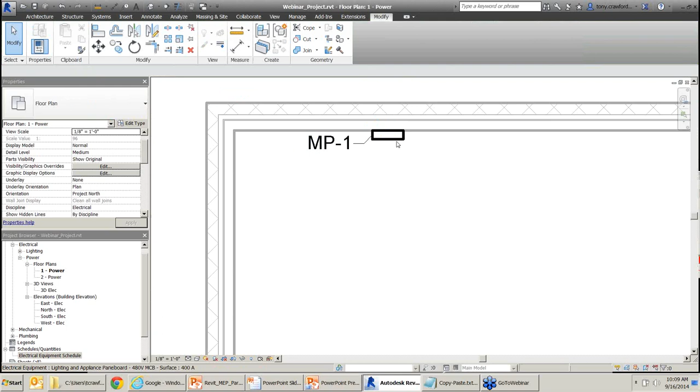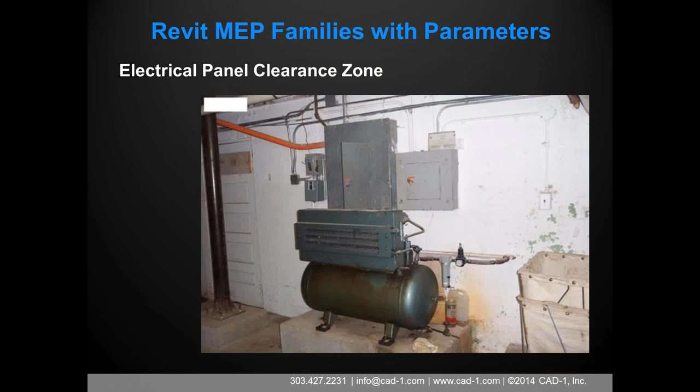Okay, that's the one I'm going to alter because I want to have a clearance zone around this, so that I can do clash detection, so that at least in the virtual BIM world, in VDC, BIM, I can prevent things like that - assuming this was new construction, assuming it was planned, which this one was probably not planned very well.

So I'm going to put a clearance zone around there so you can specify and do clash detections.

Is it Monday again? Yes. Every time you say that I keep thinking of Flash Gordon, Master of the Universe. Great, now that's your new nickname, or Jason over at BCR's new nickname - Clash. I don't think he's old enough to remember that though, he's a young whippersnapper.

Anyway, so I'm going to open this file, and what we're going to do - the first few steps, kind of maybe even on paper - is just take a look at the family. What already exists in the family? This one's fairly simple, which is good because I need to get it done in an hour.

How are they used? Are there formulas already in there? Are there values in there? What are the reference planes named? That would be a good thing to take a look at, and you do have to click on the reference planes one at a time to see what the names are.

Where you want your clearance zone - left, right, top, bottom, 30 inches, 36 inches, whatever - so basically plan your family. This step, honestly, if you pulled out a piece of paper and did it by hand - I did that for this one, just to keep myself organized. So that's not a bad idea, to plan it out ahead of time. In fact, I'd recommend that.

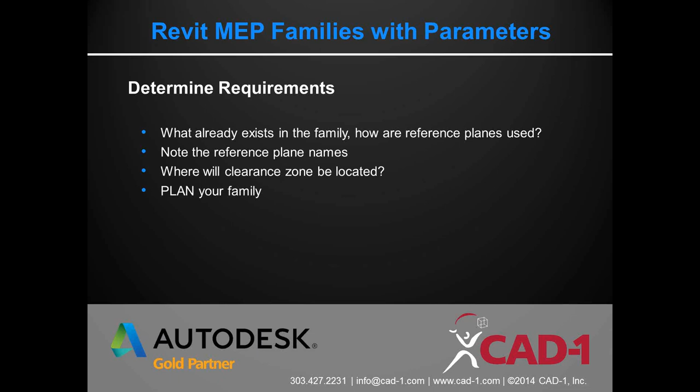It's a model - the clearance zone is a model element - so it can be used for clash detections, whether in Revit or Navisworks, or just so it shows up while others are designing, so other disciplines can see the space that you need. This could be electrical, mechanical, plumbing, architecture, ADA requirements, around doors and bathroom stalls, whatever. You can use the same principles for just about anything.

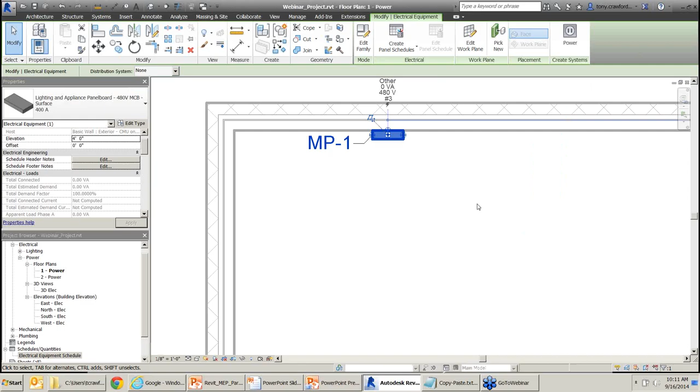So the steps I'm going to do: first I'm going to rename the family - you might have a family that doesn't need renaming, but in this case I'm going to add our company name, company standards, so I know this is the approved one I've worked on. Then I'm going to create reference planes, add some dimensions, some parameters. Let's go ahead and do these first few steps.

So I've selected the family, I'm going to open it in the family editor and edit this family. It's a loadable family, a component family - see if I can get the whole name - there we go, it's an RFA file. At the top of the screen you can see the file name: Lighting and appliance panel board 480V MCB surface.rfa. RFA is a Revit family format.

Where'd you find this family? I was going to say it was in the template, but this one was not - they did not have the surface-mounted ones. That's a good question there, Chris. So did you get it from like an online source? No, this one isn't out of the box. But if you wanted to get something, what would be the quickest way to get a family from your program right here?

The quickest way to get a family - you know what, I can do this without even leaving Revit. If I need a specific family from a manufacturer - this panel, this switch, this air handling unit, this PTAC, whatever - from the Insert tab of the ribbon I can just start typing in Revit, and it'll search Autodesk Seek. It already knows what program to search - Revit families. Oh, you can't see the little circle I'm doing on the screen, maybe some of you can.

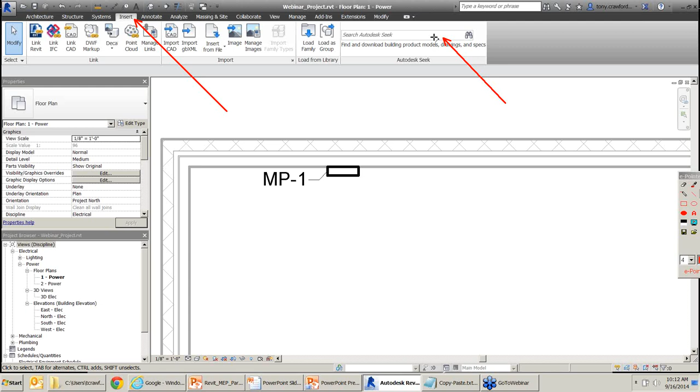So I can do this from right within the family. That is handy - they added that a couple years ago.

Okay, so here's what the family looks like - this is what's inside there if you haven't opened up families. This is a face-hosted family, and this block, this box around there, that's the face that represents the host. It's not actually part of the family - when you load this back into your project, that does not come with it.

And if you select it, look at the properties - oh no, wait, it doesn't say host. It just says other, which is not super useful, but it is what it is. Quick way to tell, well...

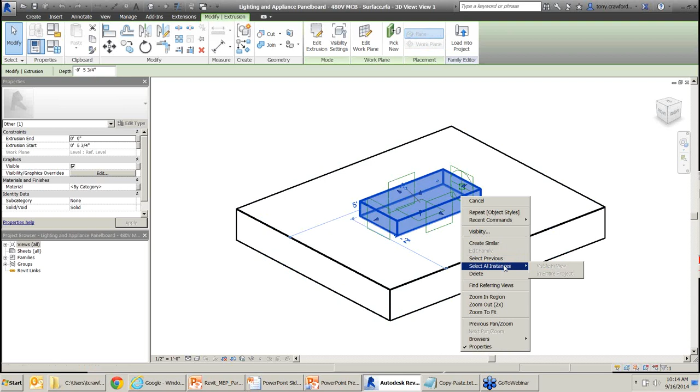One quick way to tell: if I right-click and try to delete this, delete is grayed out. It doesn't let me delete this host, as opposed to another extrusion. There we go - if I right-click, oh, I can delete this one. It allows me to delete it. So that's a quick way to tell.

I'm not going to delete this - well, I can't. What I am going to do is select it, and this is optional, but just hide it because I don't need to worry about this host. It's just going to confuse things. I'll probably hide this in a couple of views.

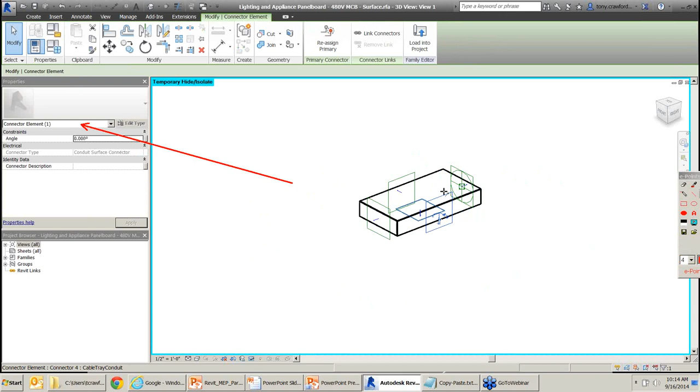So I selected it, then at the bottom I have sunglasses - I'm going to hide element. Also, these green items are connectors. If you select one, it does tell you it's a connector element, and you can see the different properties. What I'm going to do with this one, because I don't need to worry about these, I'm going to hide that whole category, and all the connectors will go away. Okay, that's a little cleaner.

This is what's inside there. I'm actually going to have to do this step again because I'm going to go to the reference level, basically a floor plan, a look-down view.

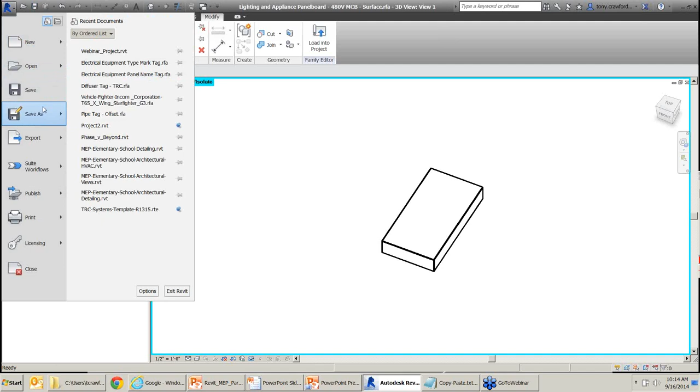Let's see - oh, first thing I almost forgot to do: I'm going to save this family with a new name. Oh, now the circle's showing up, at least on this screen. Will the circle be unbroken? It looks like it, but it keeps moving. Yeah.

I'm just going to put this in the same folder. You might have company standards, CAD-1. I can't talk and type at the same time - otherwise, one or both go really badly. I'm going to just add whatever your company name is at the end, or something useful, like maybe clearance zones, or whatever is useful at your company. Hopefully there's company standards for naming families, for naming files. If not, you might be the one responsible for creating them.

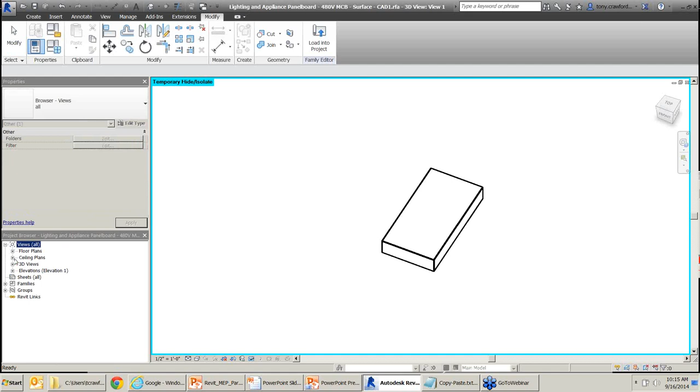Okay, now when I load this into my project, it will have a different name and it won't overwrite what's already there. Let's see - some other views. I'm in the 3D view right now. I'm going to go to the ref level, which is basically a floor plan that's looking straight down on this project.

And I'm going to do the temporary hide again, just to keep it a little simpler. Once you're comfortable, you might not need to do this, but let's hide that element, hide that category. Okay, that's a little bit cleaner. And then you can see this family is pretty simple.

I've got the geometry, the extrusion in the middle, and what - 1, 2, 3, 4, 5, 6. Math is hard - 6 reference planes. So I'm going to add actually more reference planes and more geometries, more extrusions.

So the first thing I'm going to do is add a couple of reference planes - a couple ways you can start the commands. I'm going to put a box around the outside of the existing reference planes. I'm going to draw them consistently from left to right. It doesn't matter quite so much which way you go as long as it's consistent, and even Revit doesn't care which way you go, left to right.

Bottom to top is the way I'm drawing, which is drilled into me by my high school drafting teacher - left to right, bottom to top. Basically because of drafting pens and pencils we used.

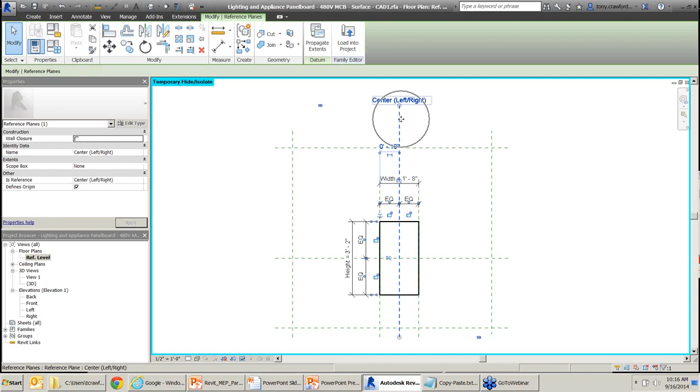Notice that when I select this existing reference plane, the name appears at the top - that's why I did the consistent left to right, bottom to top. So when I name this one that I just added on the left, I'm going to give it a name, and that name is going to be, bear with me half a moment - I'm just doing a little cheat so I can type faster - clearance left. Whatever happened to all those drafting tables?

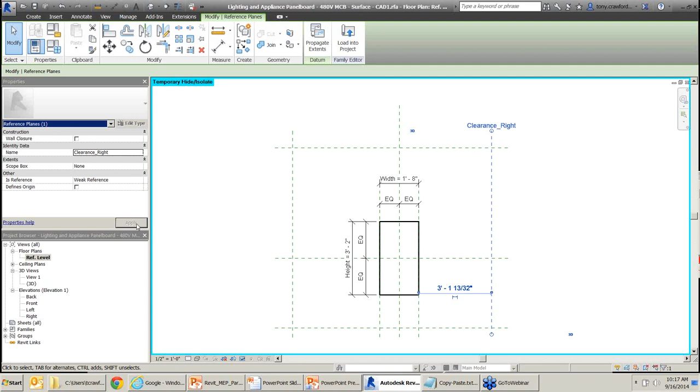They got sent home with these tables to people's back bedrooms, and their wives complained, like, why do you have this huge table here? You don't need this. Well, it's great for folding stuff. Honestly, what I did is, I can get a table anywhere, but the green matte self-healing surface, I peeled that off one before it got tossed out of the office, and I still have it, never actually used it. So I feel good about that decision - the drafting table I've never used in 20 years, I've only had to move a small rolled up piece of green plastic instead of a giant table I've never used.

Also, make sure you guys watch the Discovery Channel. Tony will be on Hoarders pretty soon. Wait, no, you're not supposed to know about that. That episode's not going to air.

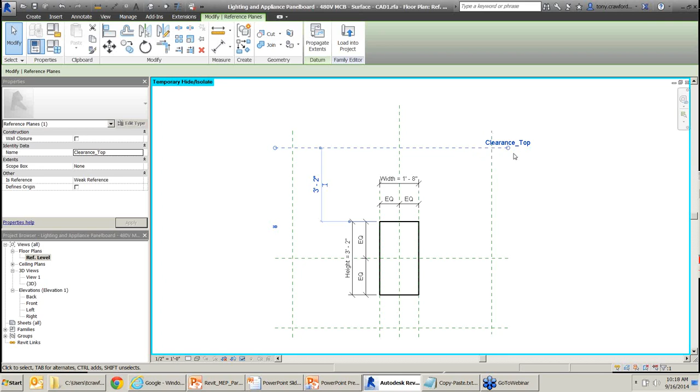So I've named my reference planes - I drew a box around this with reference planes and gave them names. The names aren't super critical, but they're useful. It's a habit of mine to always name reference planes and always draw them the same direction, left to right, bottom to top, for consistency. When you're drawing them in the project, they're not as useful if you don't name them - they just don't appear in the list without a name.

Okay, so we added reference planes and named them. So in this slide, we renamed the family and created reference planes. What's next? Let me add some dimensions. All right, there's Revit - so add some basic dimensions.

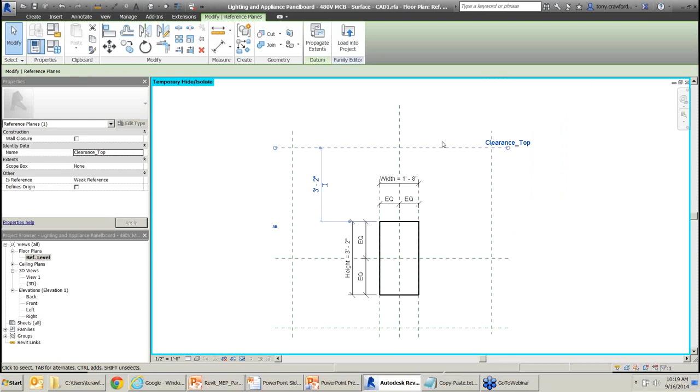I didn't point out the ways of creating the reference planes. I'm kind of a keyboard person, so I type DI for dimension. I'm just going to add these other dimensions, even though I don't need all of them quite yet. Right now I'm just going to work with this top dimension. DI is a keyboard shortcut for dimension aligned - it's the one I use 90% of the time.

When the dimension is selected, I have an option in the options bar. Always look at your options bar - there's often good stuff in there. In fact, as far as I know, this is the only place where I can add a parameter. I can choose an existing one, like width. Oh, I'm going to do a width - nope, I'm going to do a clearance width. This width is the property referring to the width of the electrical panel.

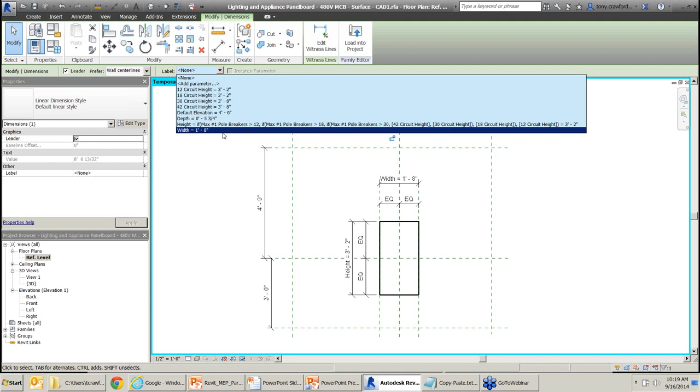I want to add a new one, so I'm going to choose add parameter. Brings up my properties. I'm going to do clearance - let's do clearance width. Okay, good, I spelled it right. Everything else right now is fine at the defaults. It's a type property. I'm going to group it under - the grouping is just where it's listed.

Ooh, you know what? I can edit the tooltip. This is a new feature in 2015 that I really like. It's nothing grand, but I think it can be really useful.

I've seen companies - let's see if I can spell this, D-I-S, I swear I hit capital D both times - change the tooltip to something specific to the company, or something useful. I've seen companies where previously their parameters were named really long names, like 'this is the parameter to be used for the width of the overall box, blah blah blah.' That's a really long parameter name. So I think these tooltips are really handy.

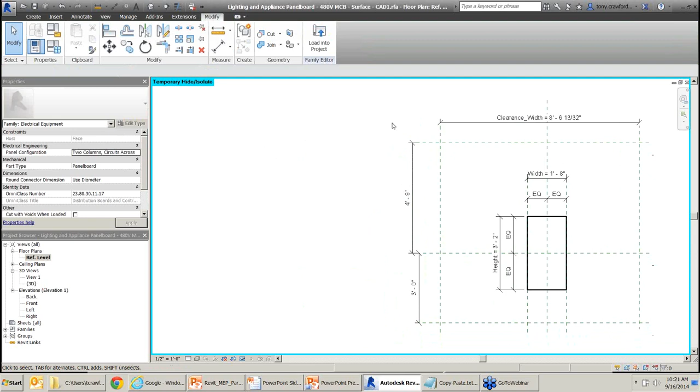Thanks, I'm the one who came up with that idea too. Oh, did you? They used to name parameters really long so people could explain them. That's useful. Before tooltips, that was... after I invented Post-it notes. Wow. You know, I think my high school physics teacher invented the super ball, but he didn't like to talk about it because his manager at Lockheed, or Boeing, or Raytheon - I think it was Raytheon - got credit and patented it, even though it was his team that invented it. Those are really good for the missiles they design. Well, it's kind of an accidental thing, like, hey, this experiment turned out poorly, but kind of like the microwave.

Don't stand in front of the radar. That's why they were originally called Radarange. And Radarange was some of the first microwaves.

So I added a property, and we're going to do what's called flexing it. Right now it's 8 foot 6 inches and some odd fraction. Let me make this 6 foot.

Basic families is you put in reference planes. The property parameters will drive a reference plane. Let's see if that works. The reference planes will drive the geometry. We haven't done the geometry yet, but we'll do that next. So it looks like it's working.

If I make my clearance 6 foot, 5 foot, you can see these reference planes are moving, but dang it, they're only moving on one side. I need to add another property. Previously, I started with a dimension and then created a parameter. I can also create a parameter starting in here, then we'll add the dimension.

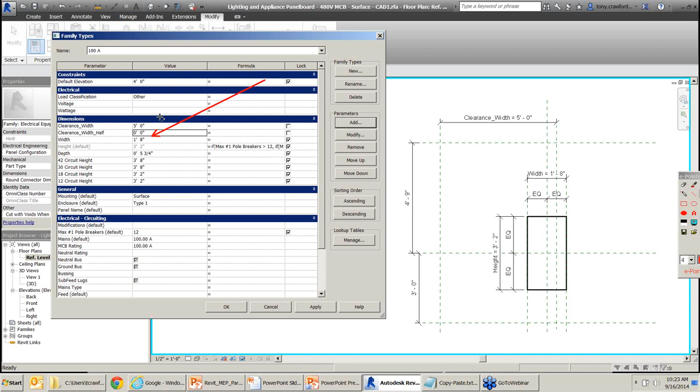Clearance width half. So I added a property in here, but I haven't done anything with it. Let's do something with that. I can move these reference planes, they're not locked to anything yet, I can move them around and change things. I'm going to add another dimension, just like we did before.

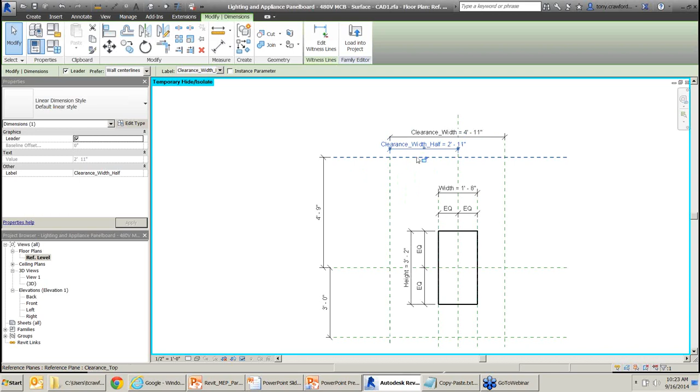I did DI. So from the center of this panel, and the center that reference plane is used, I can put in a dimension, go up to the top again, add a parameter. Oh wait, I already have a parameter, I can choose this one. Watch what happens to my reference planes when I do this. It took that value. It was 0, and now it's taking that value.

So let's try flexing it again. Flex your model early and often, make sure stuff works. So clearance width, make it 5 feet. Hit apply, let's see what happens. Oh it moved, that worked, but clearance width still isn't adjusting equally.

It's not being centered. So what we need to do, this is going to be our first formula. Not a value—clearance width half, it's going to be a formula: equals clearance width divided by 2, that's all this one is going to be used for. Let me hit apply, make sure it works. Oh, would you look at that. Now if I change my clearance width to 4 feet, apply, these are changing equally. I probably could have done that.

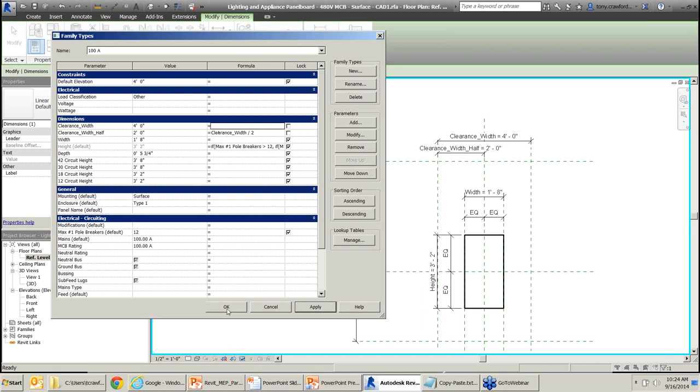No, actually I did need a dimension for this. I was going to say I could have done that with just a formula, but that's later on. I think there's something we can do with these formulas.

So we've renamed the family, we created reference planes, we added dimensions, we added parameters. Let's skip ahead and add the extrusion just so that you can see what it's doing here.

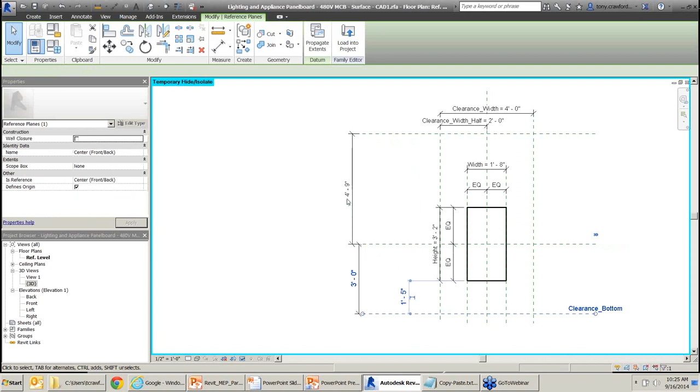I'm going to go to the 3D view—oh sorry, not yet, I need to add the extrusion, we haven't done that part. Right now I've got the skeleton, like the bones, the reference planes. I've got ligaments or muscles with the dimensions and parameters, but I don't have any skin or flesh yet, if you're using a physical analogy, which has been used before.

So I started the command for an extrusion. I'm going to create an extrusion rectangle, and you can see I'm snapping to the reference planes, that box I drew earlier. Once I've drawn the extrusion, it's important that you go right back and lock these. You can come back later, but it saves me a few clicks if I do it right away.

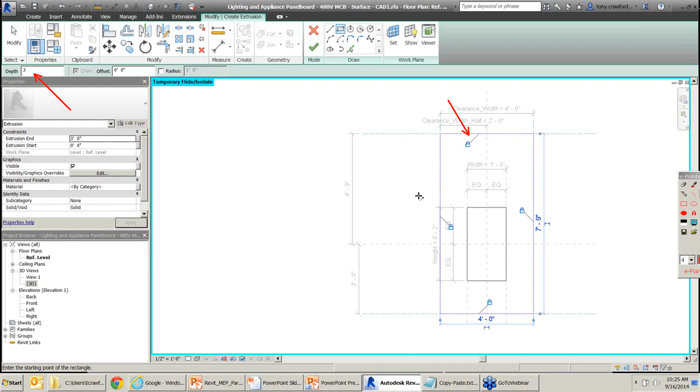Let me change—whoops, not 15—my extrusion depth. I've done a couple of things: added the depth, though that one's not so important. Creating the extrusion and locking it is the important part. All right, so I'll finish that up. Looks so far so good. Let's look at it in 3D.

Here's my 3D model. Now let's try flexing it in 3D. To flex it, I'm going to go back to my family types—you might hear me call that the properties box, because I do that sometimes. If I change my clearance width to 4 feet... let's make it 2 feet.

Hit apply, and oh, would you look at that? It's working. With an audience even.

I recommend flexing, and I've said this before, I'll say it again: flex your model early and often to make sure it's working. Because if you wait till the end and find out it's not working, you've got a lot more settings to troubleshoot.

It's hard to tell which ones are which. They're not making a double dimension, so hit equal on the dimension. That would be an easier way to do it, but I'm planning to add something later, so there is a method to my madness, at least this time. Sometimes it's just madness. Now I lost my train of thought.

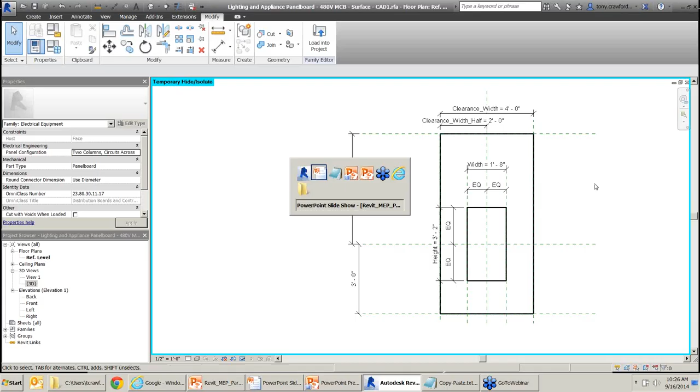Any other questions? Speaking of that, isn't there the big Thomas the Train event coming up at the Railroad Museum? I have no idea. Okay. You trying to distract me? No. Oh, because it worked.

Formulas and extrusion, locked reference planes. I'm going to go back actually and add a couple more things, because so far we can only change the width. We can't change the depth or the height.

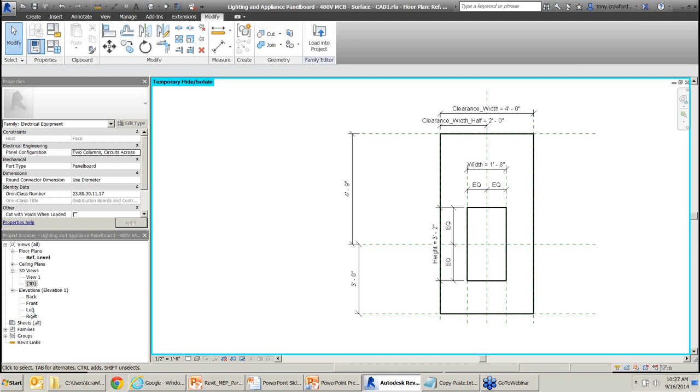I'm going to do the depth first because that's simple. Let me go to the front view. Okay, and yesterday when I was playing around with this, I accidentally did the wrong one. This is the host, and I can tell because I can't delete it. Okay, so this is the extrusion I'm looking for.

I want to be able to adjust the width of this because, and correct me if I'm wrong - I'm not an electrical engineer, mechanical is my degree - the clearance in front of the panel should be 36 inches or the width of the panel, whichever is greater. If somebody knows that spec better than me, I think I've seen 30 inches and 36 inches, to be honest, so feel free to correct me.

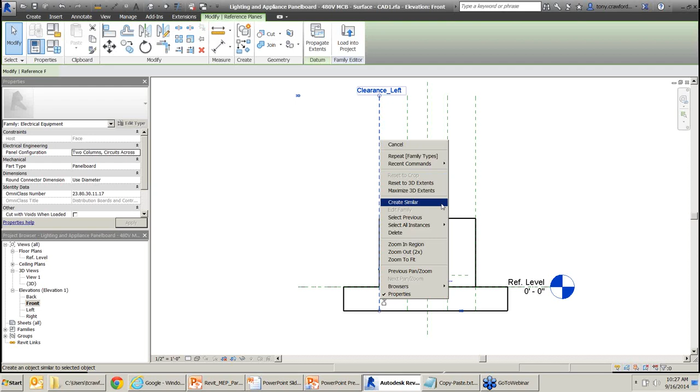So I'm going to create another reference plane. A couple ways to do that. One of my favorites is select whatever I want and type CS, which is the same as create similar on the right-click menu. Then I can create another level, another reference plane. I want this to be straight, horizontal, perpendicular, but not at an angle.

It needs to be straight. I drew it left to right. I'm actually going to give this a name so that I can use it. I'm going to call it clearance depth. Alrighty, and there it shows up, clearance depth.

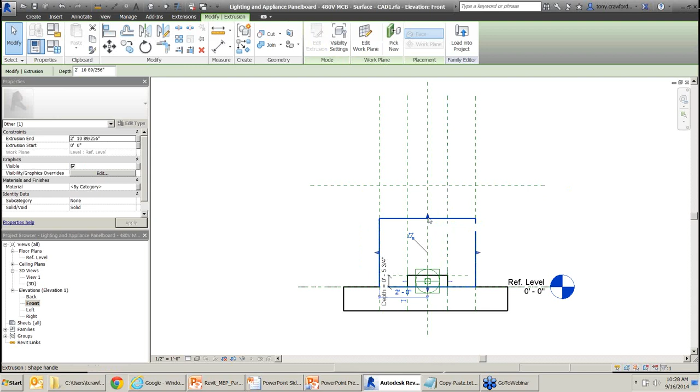Now remember how we did the extrusion, then we just locked it immediately? I can always come back later because this extrusion already existed. Just drag that extrusion, or you can use the align command in the ribbon - that one works too - or just drag the grip and then come back and lock it. Make sure you lock the extrusion with this little padlock symbol. Bam, now that extrusion is locked to the reference plane, so if I drag this reference plane, the extrusion moves with it.

If I wasn't in a hurry, I would do this in 3D. I'd have the views side by side. You can see it moving in 3D also.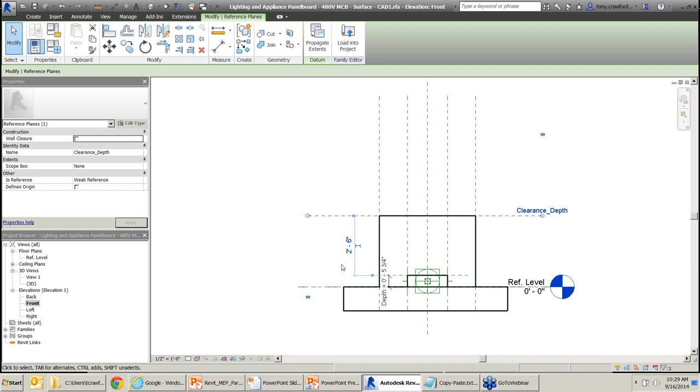So another option, I want to put a dimension in there so that I can add a parameter. The parameter will drive the dimension, the dimension will drive the reference plane, the reference plane will drive the geometry. And Revit actually works better that way. You can have dimensions drive geometry directly - sometimes it works, sometimes it doesn't. It's just the way Revit's made to work.

What I'm going to do right now is use a temporary dimension because I've selected that reference plane. If I hover over this, it tells me the tooltip: make this temporary dimension permanent. I can just click on that, and with one click I have a dimension, although now I notice that dimension went to the wrong place - it's dimensioning from the face instead of the host.

All right, so that's not the dimension I want. I'm going to have to redo this again. Where's my delete key?

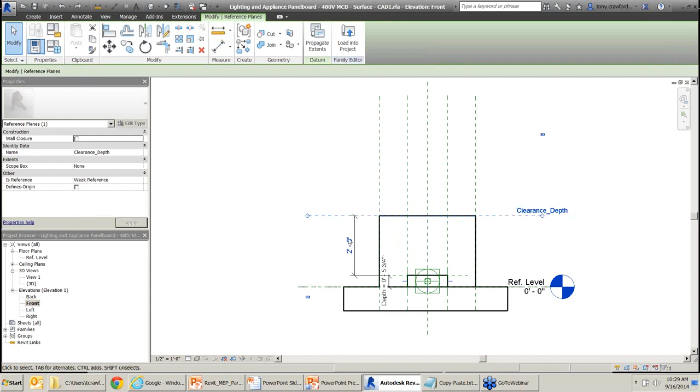I can go to the Annotate tab, Dimension Aligned. I can type DI, I can do select previous. Where's my reference plane? Where'd my reference plane go? Oh no, I deleted the reference plane. Okay, so I hit undo. Can I delete just this dimension? Okay, there we go, I'm not sure what I did.

Okay, so I'm going to do the dimension again, and then I'm going to point out something important. So I started the dimension from the reference plane.

I need the other end of the dimension to come from the reference plane, not from geometry, not from the host, not from extrusion. If I click now, I'm going to get essentially the level, which would probably work, but I'm going to press tab. It's a little hard to see on the screen, but the geometry is changing, and the tooltip shows it's going to snap to a reference plane. Remember the hover tab click? If you're not already using it, that's an awesome tool that will save you lots of time because there's things you can do with it that you can't do with other tools.

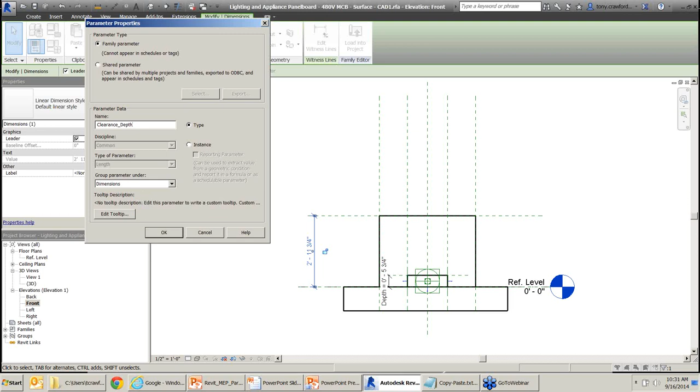Alright, I have this dimension. I'm going to go through the same process again. I'm going to select the dimension and create a new parameter for it since I haven't created one yet. I'll call it clearance depth. Everything else is good as a type property. It's a family parameter, it's not a shared parameter. Group it under dimensions. I could add a tooltip, but I'll skip that to save time. Hit OK, OK. Let's flex this.

Always flex it just to test it. So clearance depth, let's make this 2 feet. Hit apply, and in 3D, good. Change this, make it, I don't know, 30 inches. Hit apply. Ooh, that's 30 feet. 30 inches, wow, typing is as hard as talking. 30 inches, hit apply, and it moved. Let me make it, whoops, good, 3 feet. Hit apply. Excellent. It seems to be working. I can test the other ones just to make sure they're working.

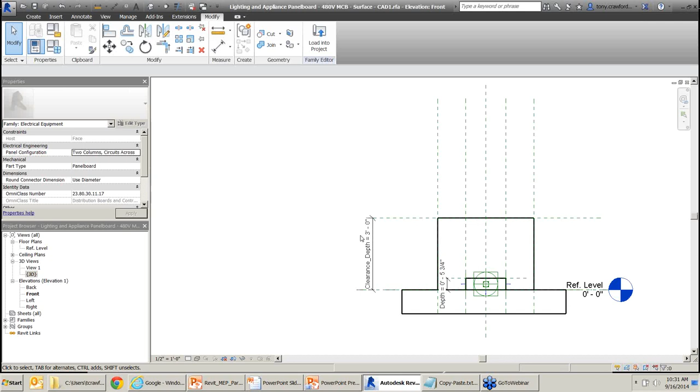Okay, so we've got a width and a depth. Those looked pretty good so far. I'm going to save the height till last because I'm going to come back to the family. In fact, let me do this in the 3D view. Back to the family, back to the formulas, the properties.

Clearance, depth, and width can, well, there's a spec for that. Oh, Chris, did anybody type in preferences, 30 inches, 36 inches? Nobody typed in anything, okay, that's expected more from Jason and some of the people. There's a lot of people on today. Oh, there's a ton. Again, we love it when the webinars fill up like this.

36 minimum from the front of the panel. Thanks, Steve, excellent, from the front of the panel. So that's going to be the depth.

So Steve wins the free tour of CAD-1's office anytime he wants to stop by. And you even get a free mouse pad off of Chris's desk if you steal it during that tour, just not the Harley one. Oh right, yeah, you get a free CAD-1 mouse pad. Yep. Try not to get distracted.

So if the width equals, say, 36 inches, or I could do 3 feet, the if-then statement is a simple formula that can be used in the parameters. Just to take a quick look at that.

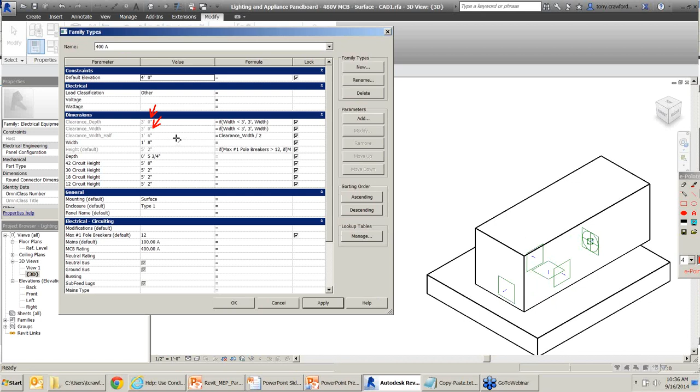So I can change this from 100 amp. Let me go to the biggest one, 400 amp. My width is still only 1'8". So this formula looks like it's working. It's keeping the clearance depth and width at 3 feet, because that's the minimum. Even if the panel is smaller, it's still got to be 3 feet.

Okay, hit OK. Going back to the overall steps, I keep going back to these same steps. We've added dimensions, we've added parameters, we've added formulas. We actually did the extrusion—I jumped ahead and did that just so you could see it. I have a couple more formulas, and it looks like I do have time for that.

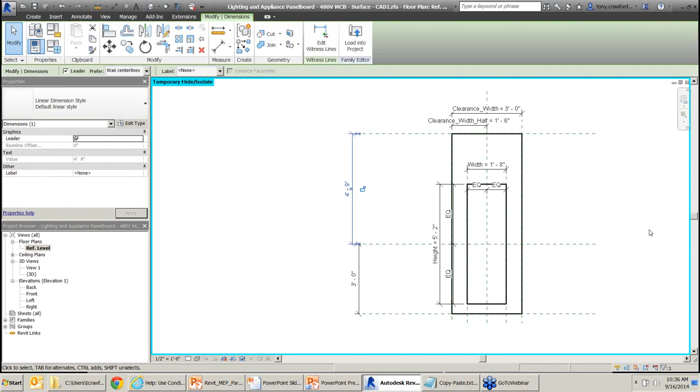Let me go back to Revit, back to the reference level. I'm going to add 2 more formulas, same process again. For this one, the top and bottom—see, on the top I did an overall width for the clearance, but for the top and bottom I need those to be different, because the bottom is going to be whatever the mounting height is, say 4 feet or 3 feet. I need this to match that distance to go to the floor and stop.

Well, let's see, let me go through this. So I've selected the dimension because I already have it there. The dimension's driving the reference planes. Reference planes are going to drive my extrusion, but I need a parameter.

So I'm going to call this... whoops, that's not it, you can tell I keep using copy and paste. Clearance—see if I can copy one of those again, because I'm a horrible typer. Clearance_Bottom is just what I'm going to name it. You can name it whatever makes sense for you—maybe just 'clear' or 'zone', something shorter. Personally I like short names, but also useful names.

Oh, the underscore is not required—it's just because I'm old school, I almost always use an underscore. Whatever your company standards are, whether it's initial caps, all lowercase, spaces, dashes, or underscores, consistency is more important than the syntax as far as naming these. So the underscore is not required, I just use it for myself for consistency, and it's a way to tell that any parameter with an underscore is probably one that I created.

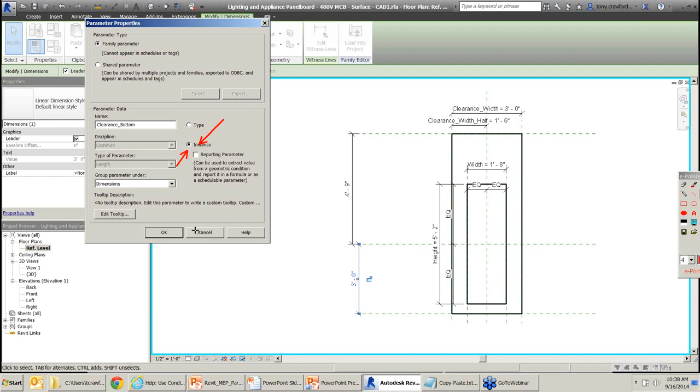So I'm going to add a Clearance_Bottom, and this is the first time I'm going to make it an instance property, because these panels could be mounted at different heights—I just want that ability. So if they're mounted at different heights, the clearance zone from the floor to the center of the panel is going to be different to match the mounting height. So this one I'm going to make an instance property. Hit OK, OK, so that seems to work.

And we'll do the same thing for the top. Add a parameter—oh, I could have created a parameter. So I can make this Clearance_Top. Make sure I make it an instance parameter again.

Before I go off on the tangent, let's check this. Looks like we're good. I should flex that and make sure to test this.

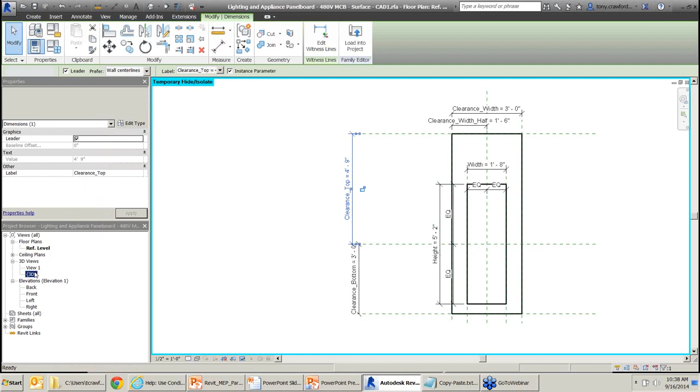I like to do it in the 3D view because I'm working with 3D things now. Clearance bottom, 3 feet, make it 4 feet. Hit apply - oh, there it goes. It moved to the bottom of my host. That's probably good. Clearance top, 4'9", let's make it 6 feet. Hit apply - oh, moved on up.

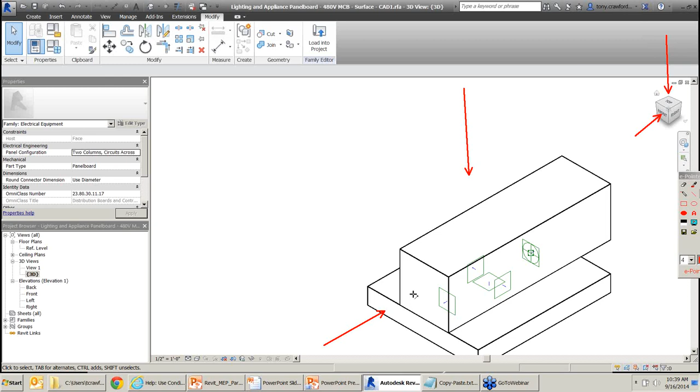Okay, so it looks like it's working, didn't break anything. When I go back to my plan view, which is really an elevation view in the family editor - a couple of things to point out. One is that when I'm in the 3D view, if you can read the view cube, it says the front is looking this way and the top is looking down, but if you know the panel, it would actually be looking at the front. Revit says this is the top.

Revit assumes that this host is always the floor, so it assumes that you're always looking down, that this direction is down, that you're looking at the floor. But this is going to be a wall-hosted object. It's technically face-hosted - it could go to any face, but we're usually going to put electrical panels on the wall, not the floor or the ceiling. Revit still, when you're in the family editor, assumes you're mounting it to the floor, period.

What you can do, you can go in and rename these views, and that renames it where appropriate. I know Juge goes through that - I believe he went through that in his webinar. So just something to be aware of. I'm not going to go through that process, just something to be aware of if you haven't worked with families before.

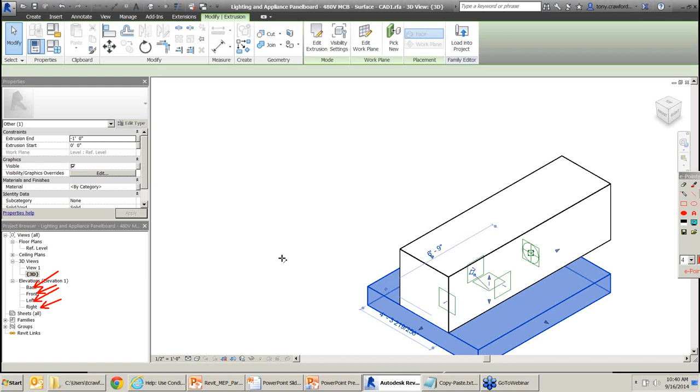Let's see, what else? Create extrusion. Oh, we need to look at some visibility. If I go back to here - wrong way, let me go back - I added formulas, created extrusion, locked in the reference planes. Let's create and assign a subcategory for visibility.

To show you why, let me save this file. In addition to flexing it, it's a good idea to test it every once in a while by loading it into your project. I've given it a new name - this one has CAD-1 in the name, .rfa, so it won't overwrite my original. Load this back into my project - takes me into the mode where I can place one.

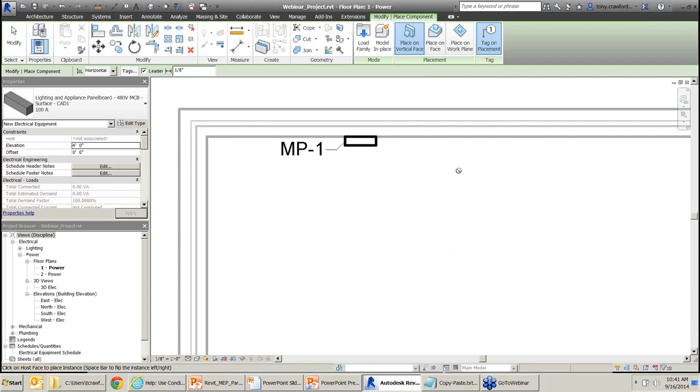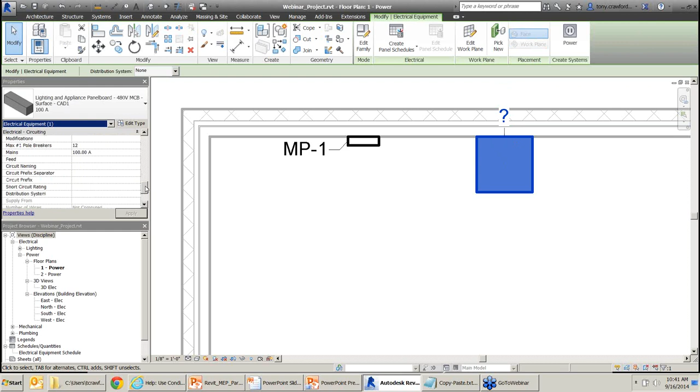Oh look, it looks kind of like the last one, but it has a clearance zone around it. In fact, the clearance zone is blocking the view. Okay, so the clearance zone worked. I can do a couple of things here - I can find my dimensions, clearance top, bottom. I can't change the clearance width because that's driven by the width of the panel, which is probably good.

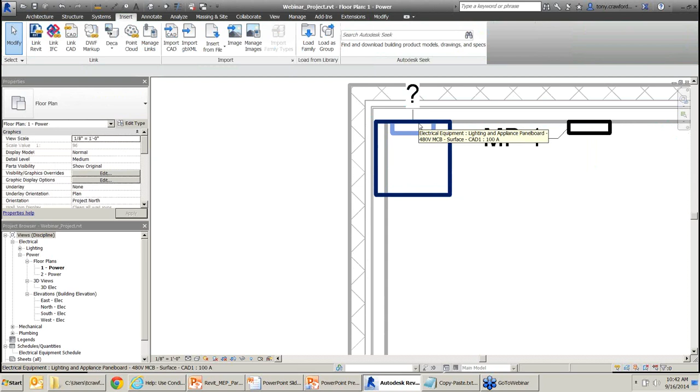Let's see, what else would I need? I might want to put an offset in here so I can go left to right, because if I understand correctly, I could put the panel - if you can see the panel in there, there it is - the panel can be in the corner and the clearance zone would still be 36 inches, but it'll be offset to one side. That's my understanding, I could be wrong, that's happened before. So I might need to have an offset value in here. If we have time, I'll add that.

That would be an instance property, and that's why, to answer a question earlier, why I did this with the clearance half width - so that I could have that actually driven, have a parameter, another value, adjust that, so I can adjust it left and right. Let's see, other things I can do.

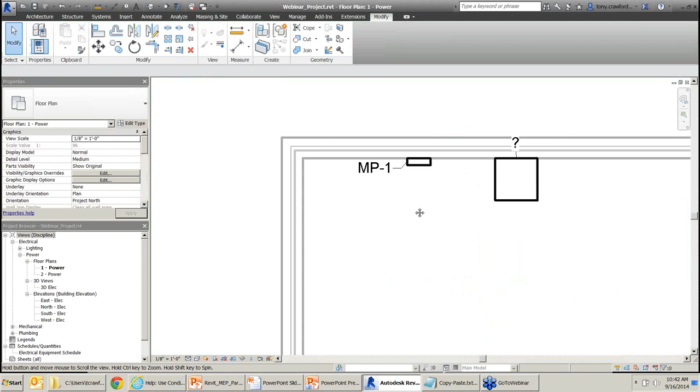Oh, it's not transparent. Okay, I need to fix this so that I can turn it on and off. All right, so let's take a look at our family, and I need to start winding down. I'll select my extrusion - I have a couple properties for visibility. I have visibility graphics, I have visible.

One option would be to come into the family and turn that on and off, then reload the family, but that would be kind of tedious, and they would all be turning on and off together. You might not want everybody in your company to open up families for editing. I could take that visibility and drive it with a parameter - I can make a yes/no parameter, and then the user can just have a checkbox to make it visible or not.

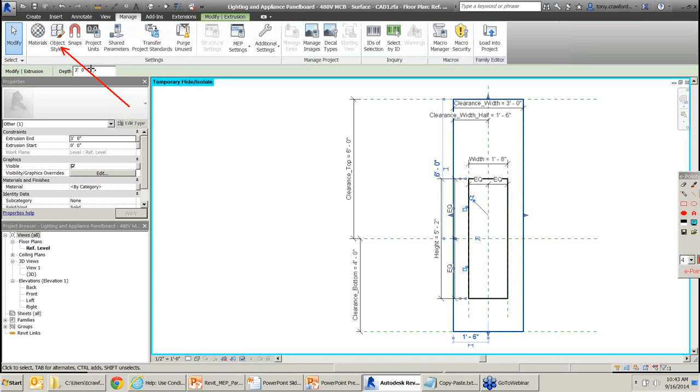Yes, an object styles, good. And then I can control that when it's in my project based on a subcategory. So I'm under electrical equipment. I'm going to create a new subcategory, and I'm going to name this clearance zone.

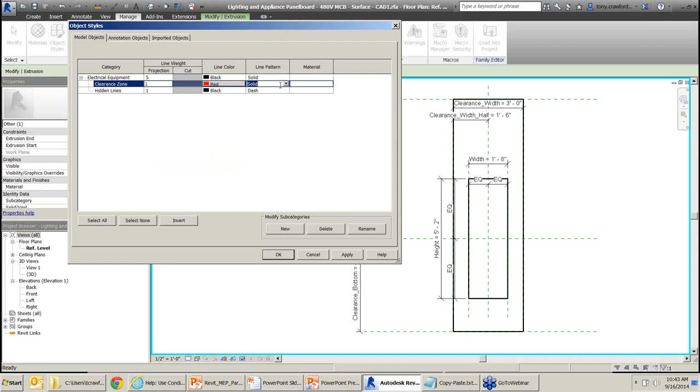I might add an underscore. In this case, I'm going to not, for consistency with other Revit things. Okay, I've got a clearance zone. You know what, as long as I'm here, I can make this, oh I don't know, red and a dash line. This will control the visibility of it in this family, and in this family when it's loaded in the project. And if I look at this in 3D, where's my 3D view, you can see that it's still not red, still not dash lines.

Oh, you know what? Now that I have this clearance zone, I need to assign that category. And this subcategory is none, hasn't been assigned yet. Well, it's because it didn't exist until just a few seconds ago. So now I can assign this subcategory of this extrusion, this object, to be a clearance zone.

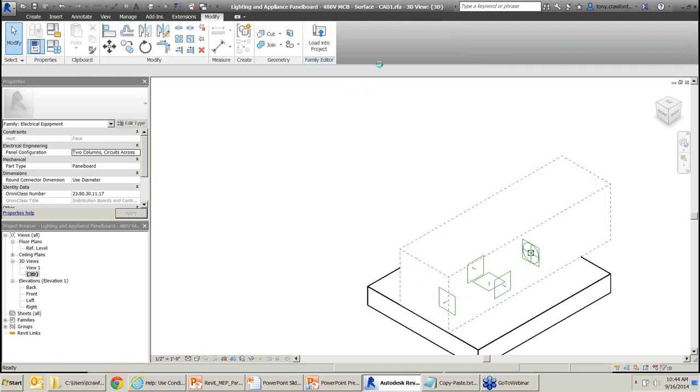Well, that's a little bit better. Let me save this file, load it into the project. I did change some parameters, so I need to choose a second one. If I only changed geometry, I could just choose the first option, but I changed some parameters. Oh look at that, that's better.

If I look at this in 3D, what does it look like? Well, I can tell it's not a panel, it's a clearance zone. But at this point there's a couple things I could do. I could go into the family and set the material to be glass, or I could go in here, and I'm kind of running low on time.

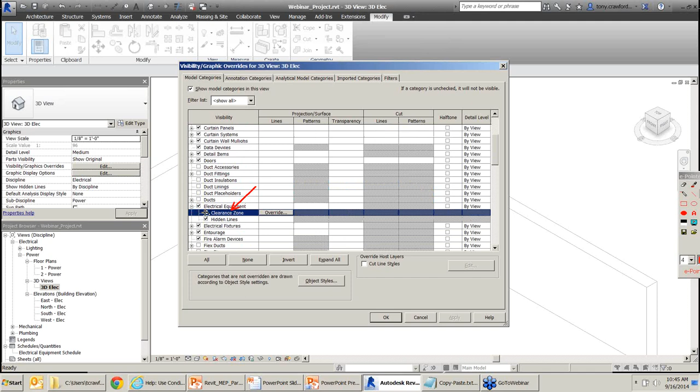So let me just go to electrical equipment, expand that, and there is that subcategory that I just created a moment ago. I can uncheck this, hit apply. Now my clearance zone is gone. Obviously if you check it, then it appears. Just because I'm running low on time, I'm going to set my transparency here to be 50%. And now you can see the clearance zone and the panel.

One of our customers says he has a separate clearance family for specialty equipment that he loads into families and locks to reference lines. That would work. Yeah, so I'm assuming that he means a family of just a clearance zone. It's not a panel, not an air handler, not a lighter, diffuser, but just a clearance zone. That would work too.

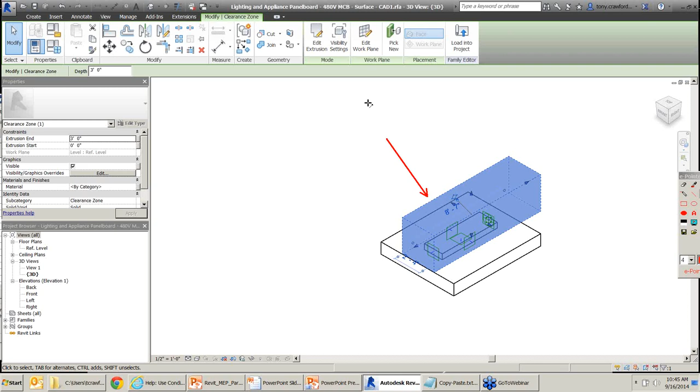I can control visibility. So very quickly, back in the family, I can also address the visibility. I've selected the object, and I have visibility settings, which are also in my properties. Choose visibility settings to say, you know what, I don't want to see this on front or back, or maybe only on fine view. I'll see it in 3D and the plan views and the front and the back.

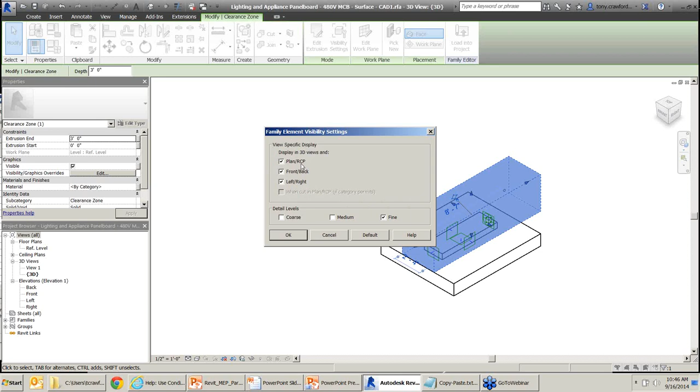And remember, I pointed out the front and the top are a little confused. That does come into play here. So if it doesn't seem to be working, it might be labeled incorrectly. What you think is a front view, Revit says is a plan view.

So when I hit OK, save it again. I hit save on the keyboard, load in the project, overwrite this, and oh, it disappeared. Why did it disappear? Because this view is set to medium. Set it to coarse, still not there. Set it to fine, and there's my clearance zone. So you can also control visibility that way.

I'm not going to do this, but I could assign a subcategory. I can assign a material to this subcategory in the object styles and assign it, say, glass, or just give it a transparency.

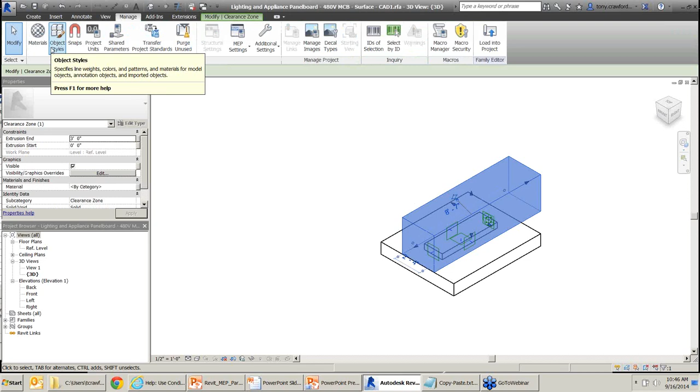But I need to wind down, so let me go jump back to the slides. I know Chris always has stuff that he wants to cover at the end. It's mostly just about Bluebeam. Okay, not going to make any.

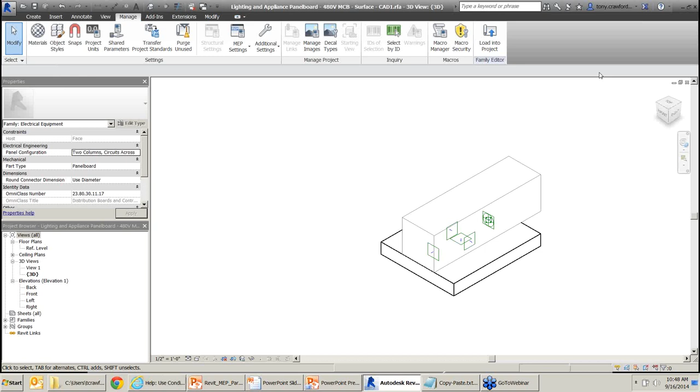This webinar is only an hour, so I can only cover so many topics, and that's one I'll come back and grab, that I just don't have time to get into right now. It's a little trickier. Same with setting it to be the bottom - you would do the same thing for the bottom.

Did you cover that in a class? I can, I don't think that's even in the next class. There's Revit MEP, it's my standard class, it's 4 days. There's Revit Productivity, which is for any discipline - mechanical, architectural, MEP, structural - covers tools useful for everybody. Almost a full day is spent on families, and we still don't even cover everything. I think most of the time I don't even get that far when we're in families, because there's a lot of stuff in families.

Beyond that, I know I've been asked if there are any questions beyond that, because the productivity class is kind of an advanced class. We have one called advanced, but it's strictly architecture. Beyond that, every company is going to need something different, so it's custom classes beyond that, or even some companies start off with a custom class. I'd say probably half of my classes have been custom. I have one coming up soon, in fact.

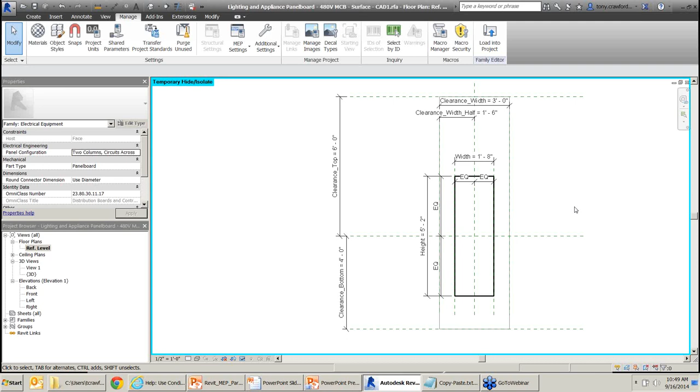So let me jump back to Revit quickly, or to this slideshow. The links that I just had up on the screen have useful information on shared parameters.

There's useful information - let me go to the Seek. If you go to seek.autodesk.com, that's their clearinghouse for families. There on Seek, you can get the Revit Style Guide, the Revit Model Content Style Guide. That has a lot of information. I forget how many pages that is, for just best practices for family, things that are expected.

Not so much a ground zero, step 1, step 2, step 3, but once you've made a few families, these are some best practices, and there's quite a bit in there. It's been a while since I've downloaded it. I want to say 50 pages - I could be completely wrong.

There is also - oops, where am I going? Okay, that was that one. Let me see, is this - and it didn't work. There is a PDF. So if you want, I can send you a copy of the PDF. You can send an email to - what's the best one we're not using - go ahead and just send it to tech.support@cad-1.com and put my name in there, if you want a copy of the PDF.

It has not been updated in a while, but it's best practices. There's several places from Autodesk where you can get more information on families. The PDF, if you're somebody like me who likes a book format, page by page, very linear, you can get that - it's just over 800 pages, I think, might be close to 900 pages just on families in Revit. That one's a couple years old.

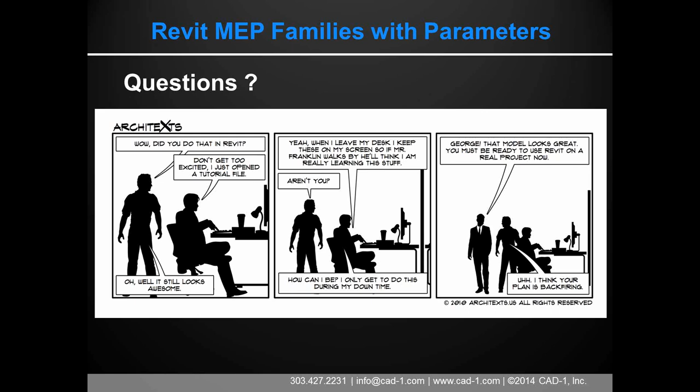I'm sure there's books out there, but nothing I could recommend - I can send you some links. You can send me an email if you want the class. Talk to Chris, and we can do it. When we talk about a class, it's not like a monster class - we can do an hour, 2 hours, or 7 hours. I recommend full days, but we can do half days too, 4 hours at a time. A lot of times the 1-hour stuff is billable, but we do that via GoTo, so you don't even have to leave your office, and a lot of times we work on specific projects you can bill to.

If you're planning on that, I really, really strongly recommend 2 monitors for the online training. You can tell your boss it'll actually save money because you won't have to travel anywhere - you stay in your office by buying 2 monitors if you don't already have them, or 3 or 4. I know there's a couple people that have that.